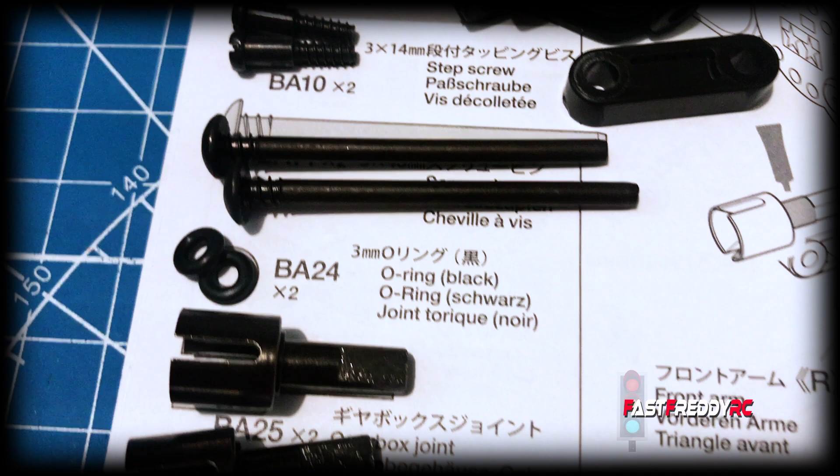Okay, so here we are, we're at step 7 and we're going to attach the front arms. You can see these are the arms that we built earlier. There's just this other piece, C18, which is going to go on either side. Here are the screws, the O-rings, and the gearbox joints, and then the grease that we're going to need.

I know I've put ball bearings in here, and normally I wouldn't use grease, but I think I am going to put a little bit here, just because I have a feeling I want to do that. And then you can see that we're going to use one of the drive shafts to help put the O-rings into those gear joints. So I think we'll start with this side, and we'll go ahead and put those on.

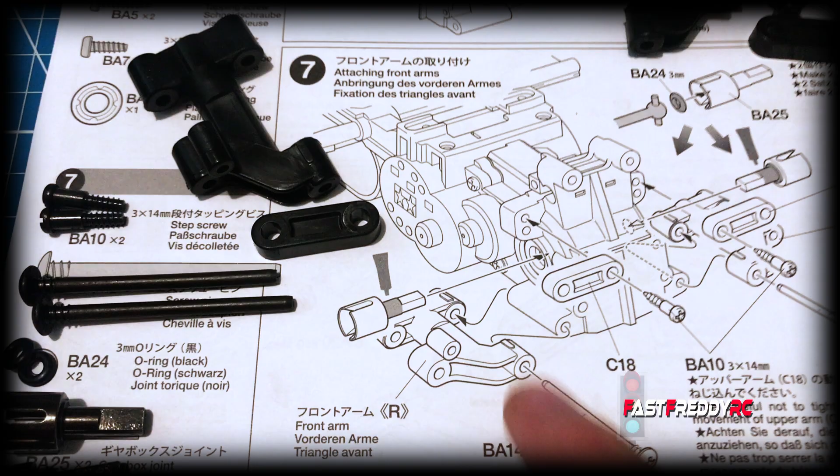Okay, so let's get one of the O-rings in there. It shows you using the drive shaft to get it in. Of course, it's got to go in somewhat level first, so that you can then use this to squish it in.

Okay, so we've got it in there. So that just provides a bit of buffer, and I think it means that it also doesn't allow the drive shaft to go completely all the way in. But I think that's good. So I'll do the same with the other one. So that's in.

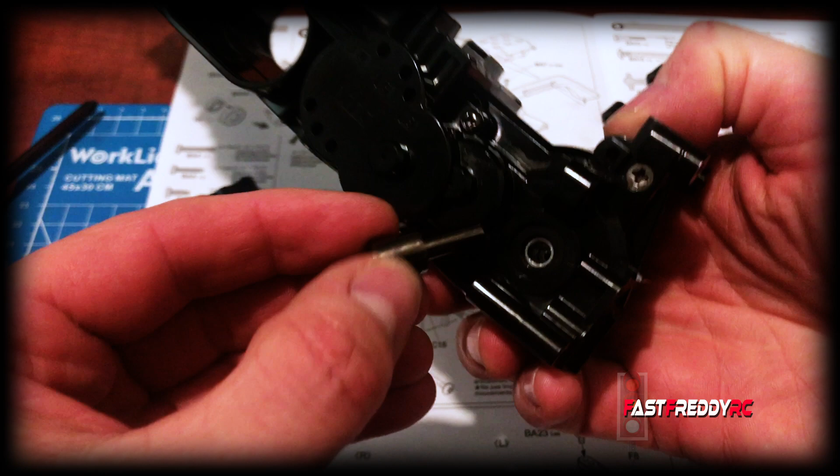So now let's put on the... actually, let's just put those in, because then they're in. There we go. And put the other one. Okay, those cups are on.

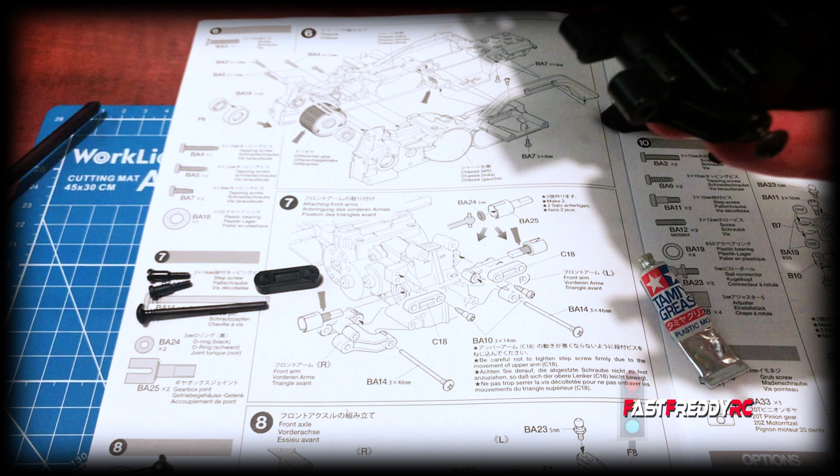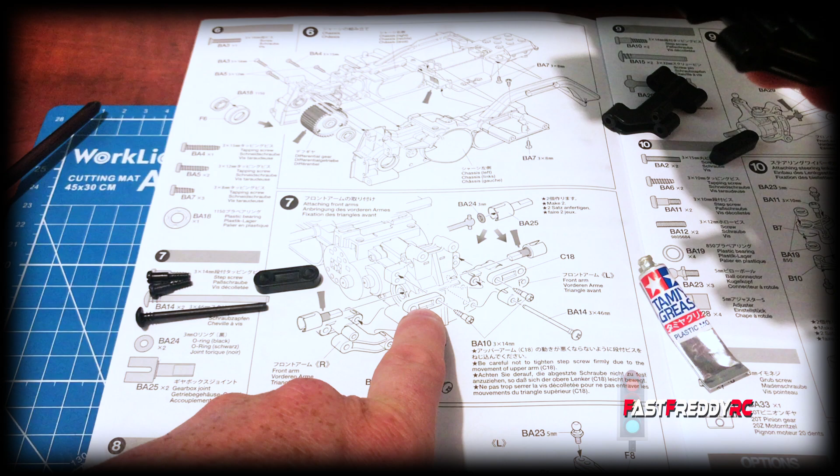And then you're going to see that we've got this one to put on as well. It's telling you to be careful not to tighten it, due to the fact that this has to move. So we'll tighten it on, but we won't fully tighten it.

So there's the lower arm. We'll do the same with the top. Grab one of these little screws, and you can see that it's going in the top hole of this piece right here. So we're going to stick that through and put it in the top hole.

And that's going to provide some movement there, so we're good. I'm just going to do the same thing with the other side, and we'll move on to the next step. Okay, so there are the front arms. Everything is on, so we can now move on to step 8, which is the front axle.

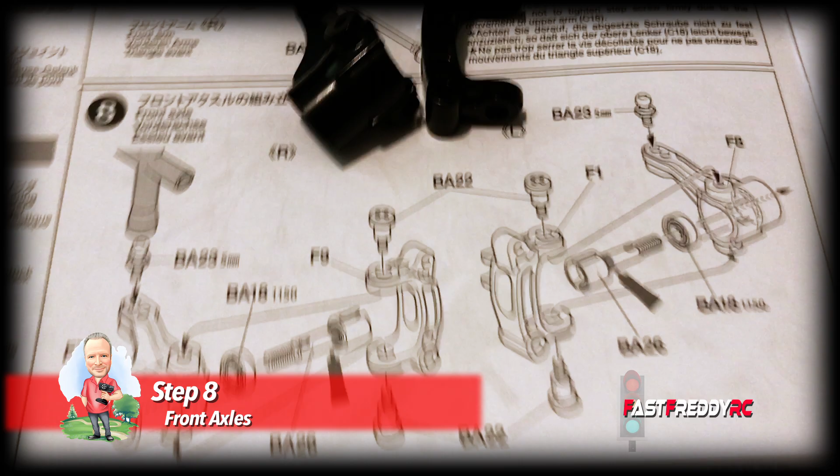So for step 8, the front axle, you can see that we're going to build both sides. I've decided to start on this side, so I'm only grabbing parts F7 and F9, just so that there's no confusion. Here's what we're needing for step 8. You'll see the plastic bearings are being replaced by the ball bearings. We've got the kingpin, the ball connectors, and the wheel axles.

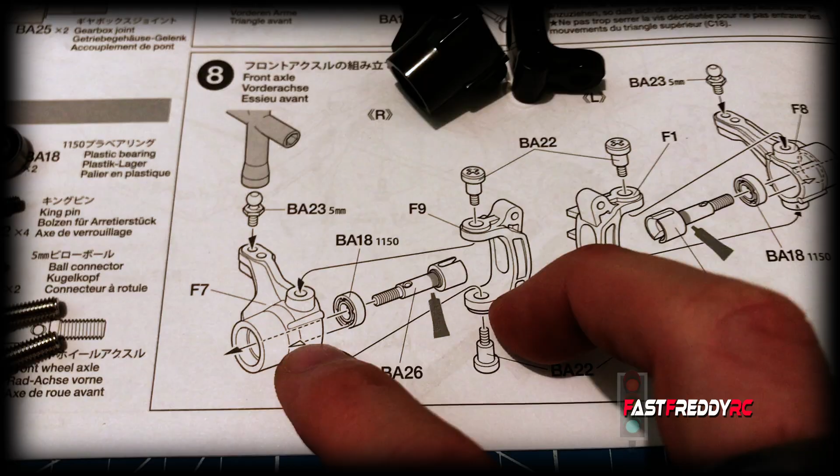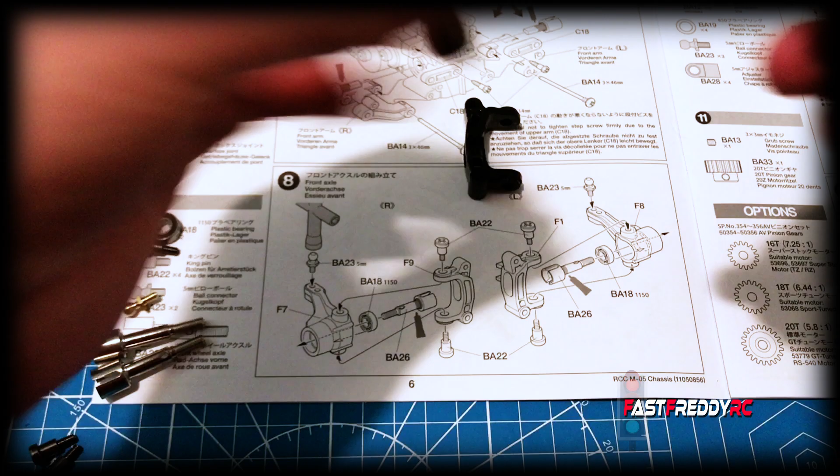So we'll go ahead and build this side first, and then I'll build the other side. So let's get the ball connector attached to this, and you can see that it's going to go into the outer one. So we'll put that here, and we need to use the box wrench to install it. There we go, that is done.

So that part is done. Then you can see that you need to put a bearing, so we'll put that on the inside. And I think I'll use the box wrench again. There we go, to push it in. So there we go, there is the bearing on the inside.

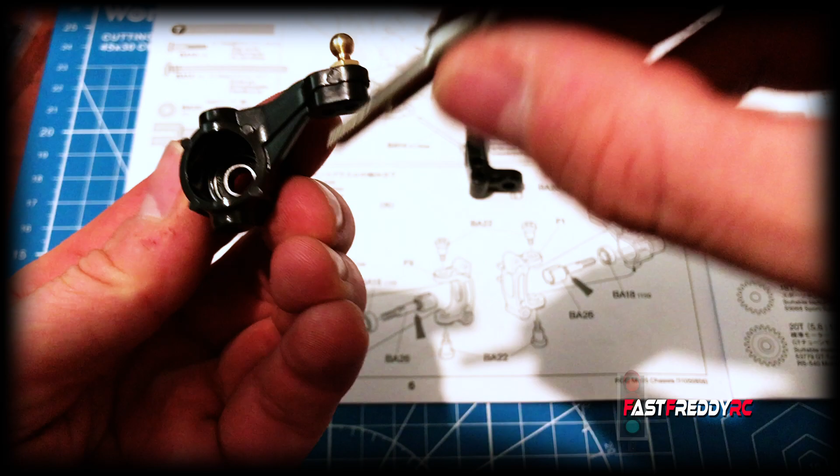And then it shows us putting this through here. And because we're going to... I think actually, I am going to put a little bit of grease on this side of it. So let's just do that.

And let's stick that back in there. So that's that. And of course there's going to be another bearing on this side, as you can see, because that's the outer part. That's going to attach to the wheel and the tire on this side, but that will require another bearing. At least there's one on the inside there.

And then we're going to take this piece right here, and you can see it's going to attach to this part. So that's got to go on like that. And we're going to take the kingpin, and it's going to get screwed into the bottom of that one.

We'll go in, just need to make sure it's in the right spot. In fact, I might take the other one, stick it on to hold it in place. It doesn't really work, but let's just see. That helped with that side.

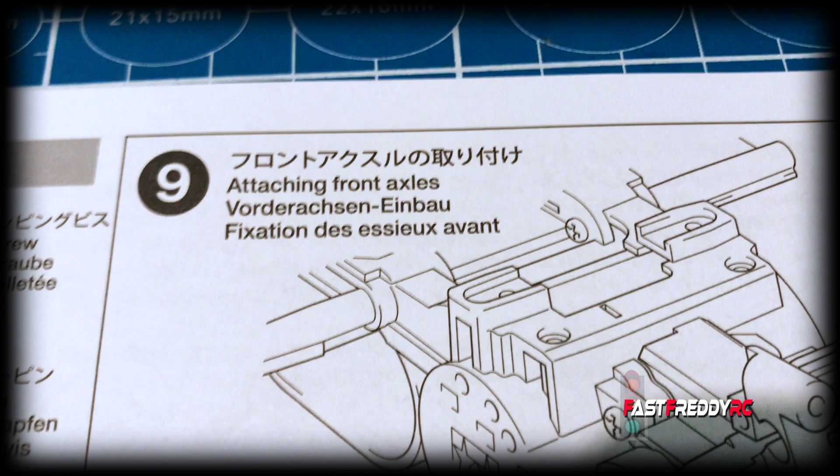So I'm going to do the same with the other one, build the other side, and then we can move on to the next step. Okay, so both front axles are now finished. So what we'll do is we'll move on to step 9, which is attaching the front axles.

And you can see we're going to need to grease the dog bone ends and put them in. And here we are. We've got the step screws, the screw pins, and both the drive shafts. So I think we'll start on this side, and then we'll do the other.

Okay, so first off, we're going to need to grease the dog bones on either side. Because this is going to have to go in before you actually attach the arms to the chassis. It's not really possible to do it any other way. I'm not going too crazy with it, but I definitely want it in there.

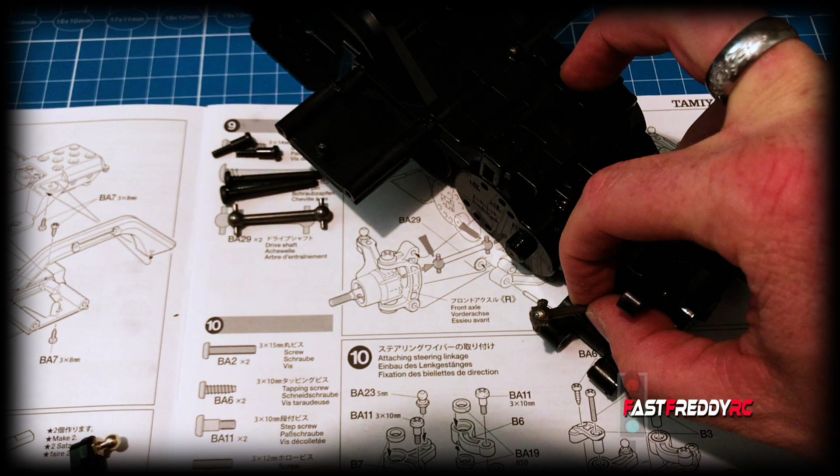Okay, so now stick that dog bone in this side, and you're going to need to stick the other dog bone in the other side, and that way you're holding the two sides firm.

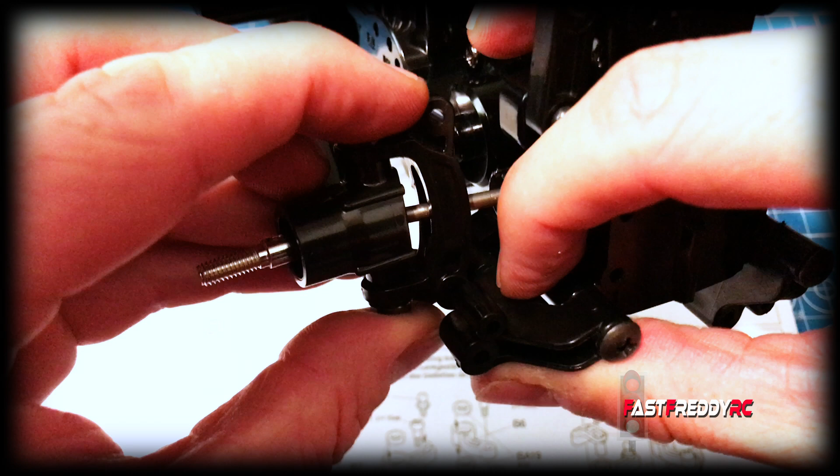Oh, hold up, I missed one little thing. I've got to get that shaft through. You can see through the arm piece before it goes onto the shaft, because ultimately that's the part we want to screw down. So now once those are in, we take the arm and that and flick it in, just get into there.

And now we take one of the pins, put it through. Of course that came out because I didn't have it right. Stick that in there. Do this again. Hold that tight. Get the pin through. There we go.

Okay, so you can see how that's set up, so that's going to attach to here. But first of all, let's get that other pin in. So I'm going to screw that in temporarily, at least get one of them in, and then I'll screw in the top end, and same thing, I'll do that temporarily.

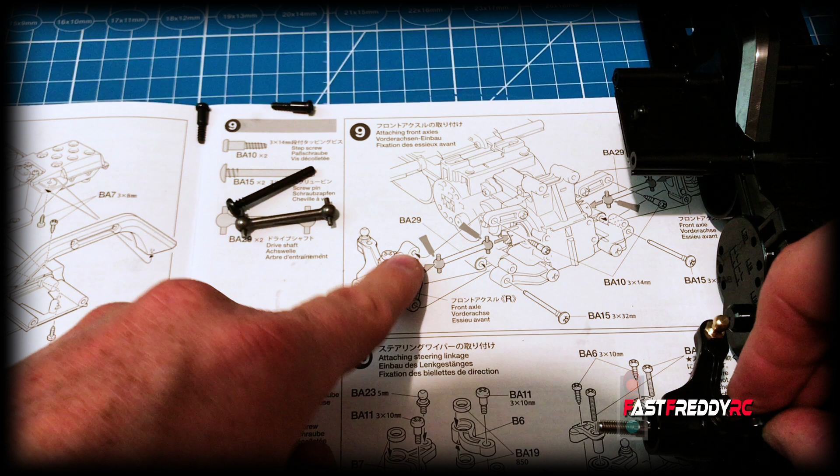Well, pretty much screwed that side in altogether. But then what you see is, what we've got to do is now that step screw goes through the top piece and then into the top of the arm. So we'll grab this one, put it through, and put it through. And now we'll screw this on.

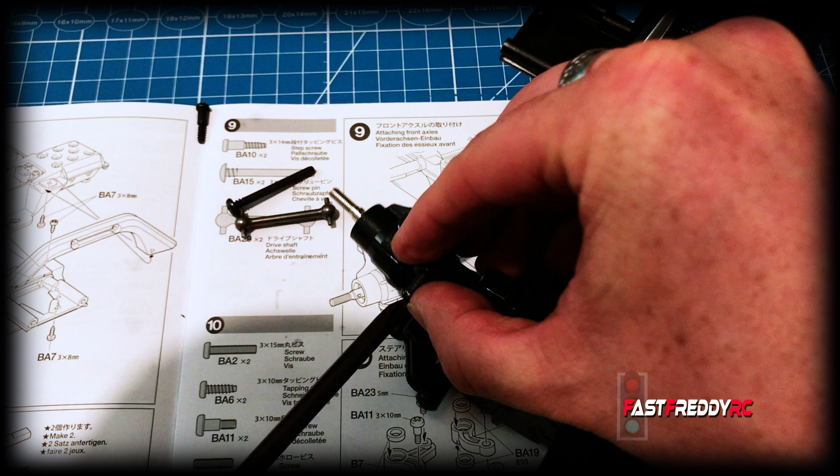And it'll be the same thing. You're not going to want to over tighten, just simply because there's got to be that free motion to allow this to go up and down. So you can see everything's in, and now you've got the free motion for steering and the up and down, and we're ready to go.

So I might tighten it a little bit more just off camera because it is a bit in the way, and I'm just kind of curious to see. But I'll go ahead and do the other side, and then we can move on.

Okay, so there is the finished front arms and drive shafts in. So this is looking cool. I can already tell there's a bit of weight to this, and obviously there needs to be now that the front wheels are the driving wheels. So this is cool. So let's move on to step 10. Now 10 is attaching the steering linkage.